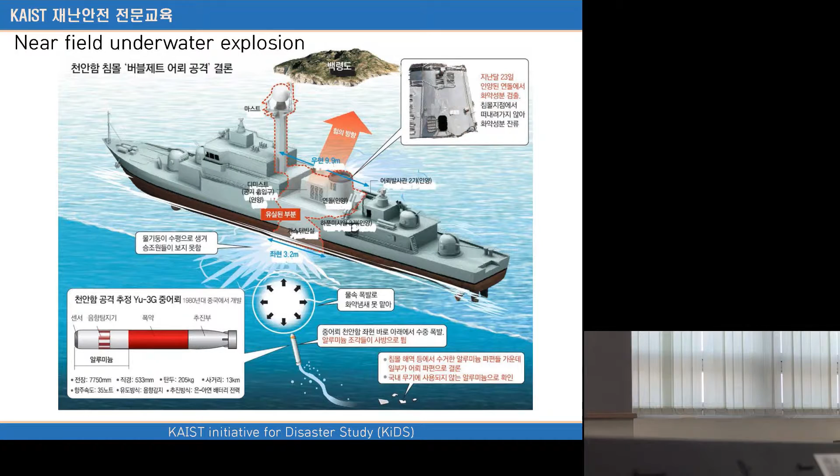There has been an official announcement that the torpedo came from a North Korea ship, but there is still debate on this. Anyway, I'm trying to show you the technological point that the explosion is not on the ship, it is near the ship. That is what we are calling near field. And then the ship is broken into 2 parts.

This is a real picture taken after salvage. This ship is still on display in a Navy base, we call it Pyeongtaek. Pyeongtaek is about west side of Daejeon. You can go visit and see this ship on display.

So this one is broken into 2 parts, and I'm trying to show you this is a near field explosion, not a direct contact by torpedo. You can expect that direct contact has a big hole when the torpedo hits the ship, but this one just breaks the ship into 2 parts. So this one is more critical to the ship - not contact, no contact.

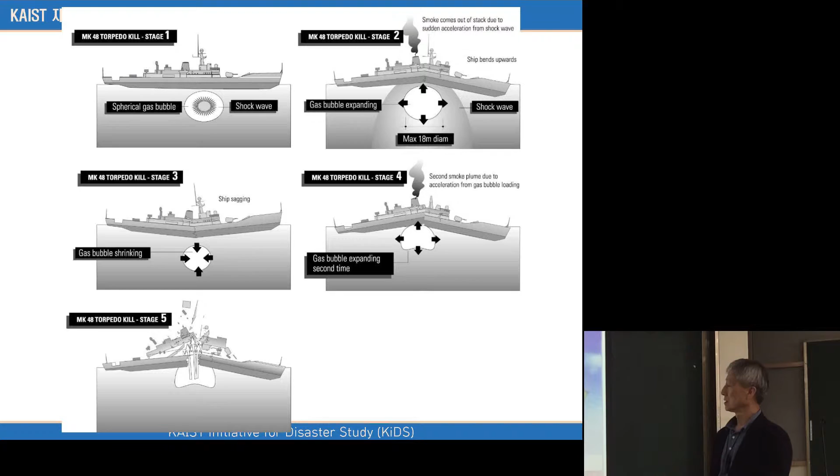This picture is coming from the U.S. Navy, so this is the technology we are talking about. There has been a report about this accident, but this is an experiment, not an accident - the U.S. Navy, long time ago. There is another test too, and you can see this also breaks into two parts, the near field.

You can see there is a regulation, United States regulation, that every new ship should have a real test and evaluation, like this one - a real experiment. Every new U.S. Navy ship should be tested this way, but not near field - this we call far field test. They want to see how the electronic equipment, including communication devices, can sustain the shock wave.

It looks near, but it is about one ship length apart. Shock wave is coming, and they want to see whether the electronics devices are safe enough. This is a regulation, a law. Germany also had a test, because this is a new ship, the ship should not be broken into two parts. So they have measurements of how much shock is coming and where.

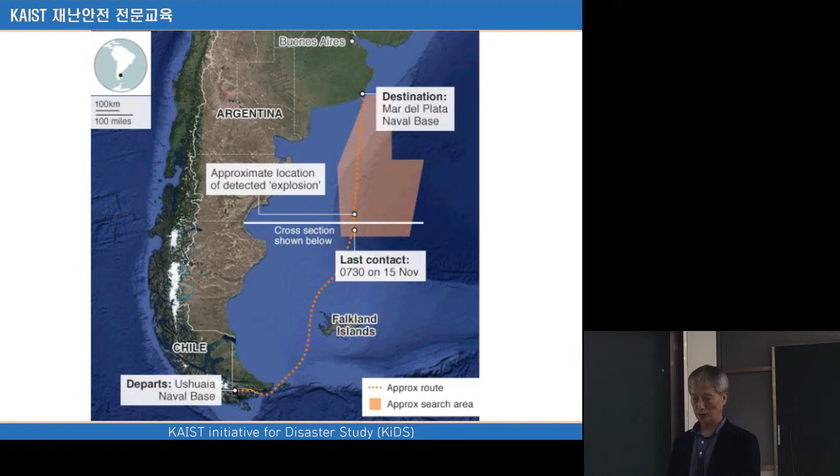And about the Sewol Ferry, we already showed you, so we can be fast. This is a ship, as he said, a long, old, renovated ship, so it has a stability problem at the beginning. This accident happened 5 years ago.

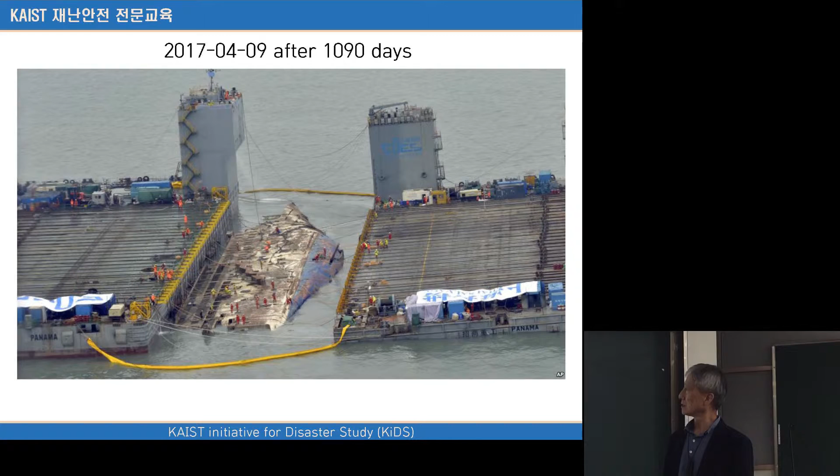So this is the Sewol after 3 years of capsizing or sinking. And this is a little bit more floating. All the wires have been put into the bottom of the ship for the floating.

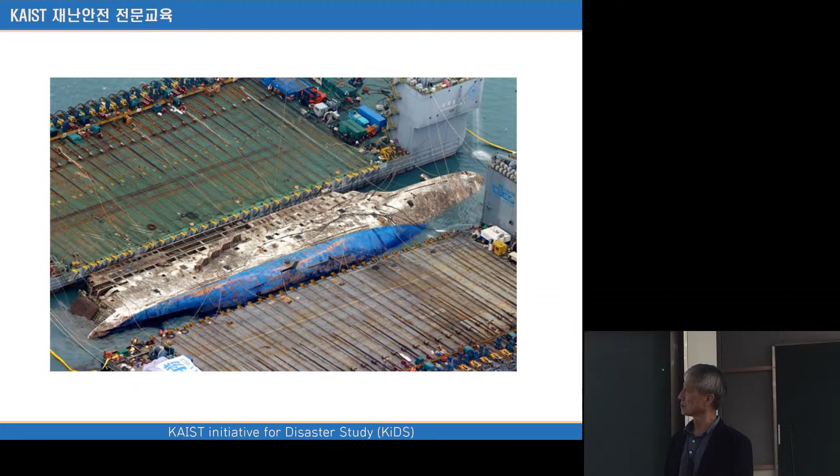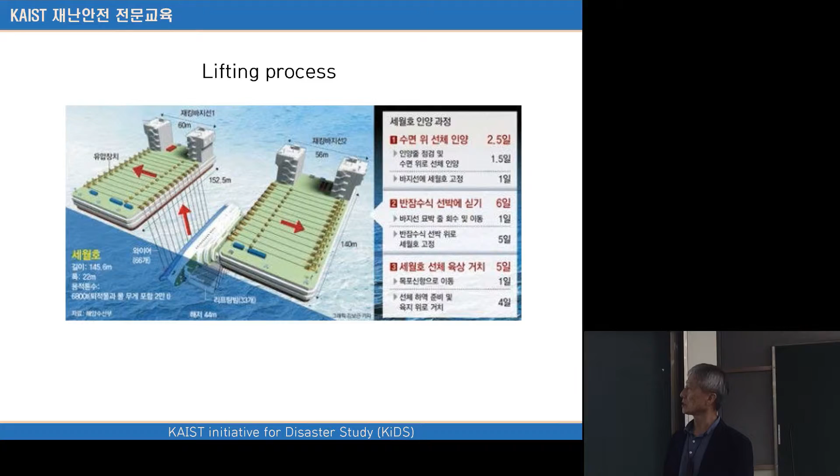And then this looks like a heavy lift ship, as we call it, for transportation toward the port. And this can be another way, but it is not used. But there are many such big ships in some shipyards in Korea. So it was one candidate to have a lifting at the time, and also this is the ship we use to carry that ship.

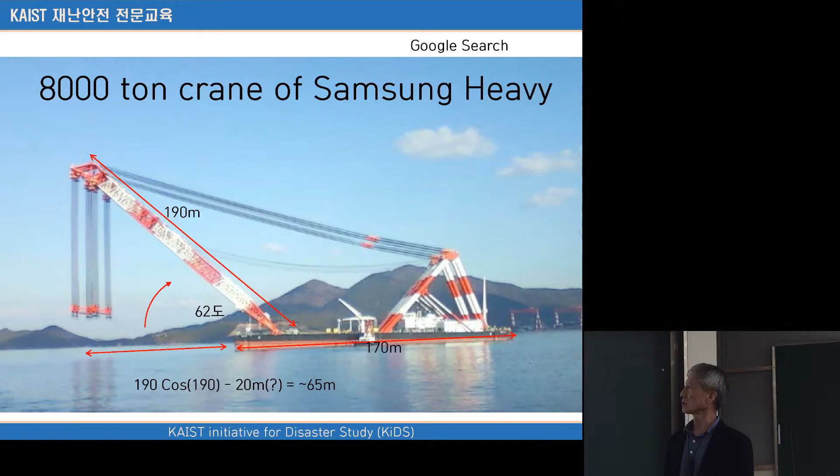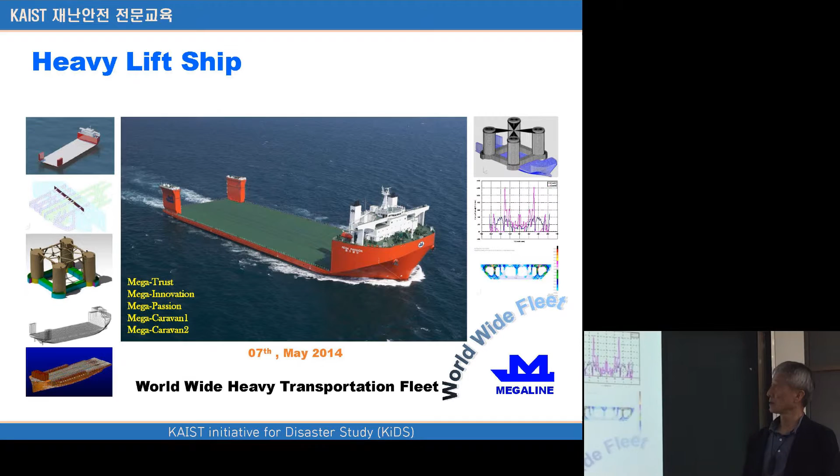Afterwards, they self-float again. So then they can be loaded like this one. After that, they can transport it in this shape. So this is a special kind of ship for heavy transportation.

This is a report coming from Sewol, and there has also been a towing test, a model test inside the Netherlands about the Sewol ship ferry. Reporting, where is it? No, 2 years ago, 3 years ago. Some videos.

And what is this? Another video. Right, another video. Okay, and this is interesting, you can see this one. You can visit it also many times.

This is the actual time, so 9 o'clock, 8 o'clock it started. So it takes about 1 hour staying in this way.

And as water is coming into the ship very fast, the angle is increasing more and more. After this, the ship started sinking very fast, so everybody was far away. We cannot do any salvage process there.

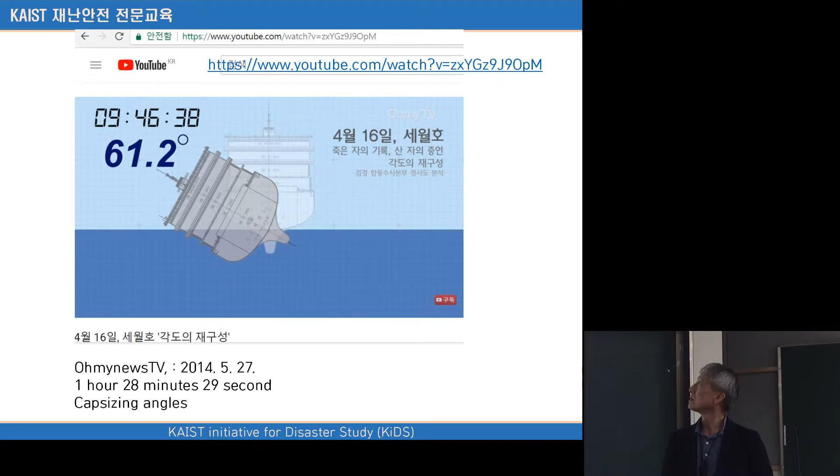Okay, and then this is the Italian Costa Concordia. You can see the number of people there, 4,000 persons. Among them, 3,000 are passengers, guests, and 1,000 are support crew members and personnel. Together there are 4,000. So if you have a big disaster like this, a sinking, then you can expect that many people could lose their life.

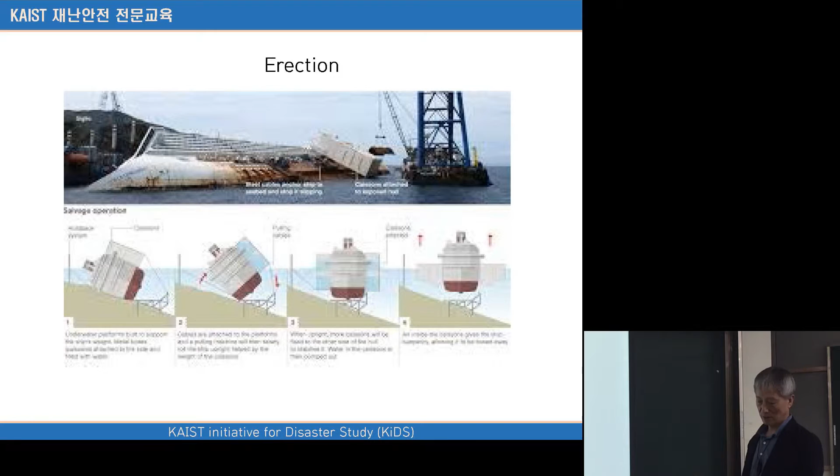So this is the idea afterward, because this ship was a very new ship, so the owner, after all the clarification of salvage, wanted to use the ship again after renovation. So they used special devices to stand it up, erection, and then transport it this way, very similar to the video of Sewol with the floating dock, and then transport it into the repair yard and renovate it. I guess they may use this one ship only.

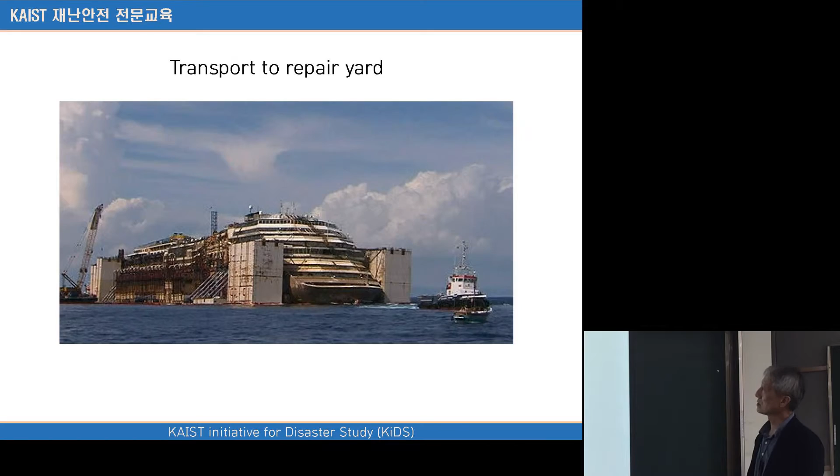This is a place where people should gather if there is an emergency, something like a fire. A cruise ship has about 3,000 guests, and also including crew members, 4,000. They cannot gather at one place, so there should be several places to escape, right? Also the lifeboats stay on two sides of the ship. But sometimes, many times, the ship is going in one direction, so the other side is where you should gather, right?

The gathering point - so I have, as a guest, a number for this. When something happens, I should go to this point, right? So an assigned point, we call this a muster station. The gathering point can be a place near the lifeboat.

Many cruise ship companies now place the life jacket at this point, rather than, in many cases for the Korean ships, the life jacket is near the guest - inside the room or near the chair. For the staircase, for Koreans, the students already wear this life jacket inside the room, but they stay there, waiting for the command.

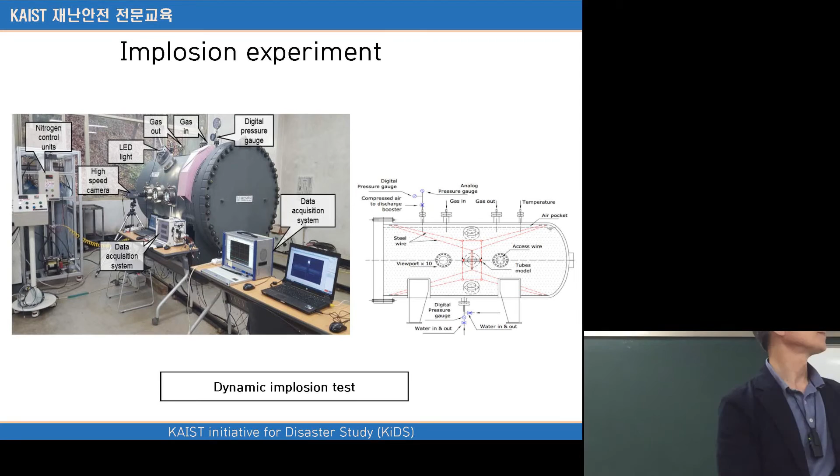This is another one called implosion. Implosion is very special, it's a reverse word to explosion. Implosion means when a submarine, say the Argentina submarine, sinks somehow - I don't know how they sink, but it goes down, 1,000 and 2,000 meters, then it collapses at some point. The report says many people heard about the sound coming from the ship. So at some point the submarine collapses, and at that collapse time there's a big shock wave coming - sound also, shock wave. So that's why we call it implosion rather than explosion - something collapsing rapidly, and there's a shock wave coming.

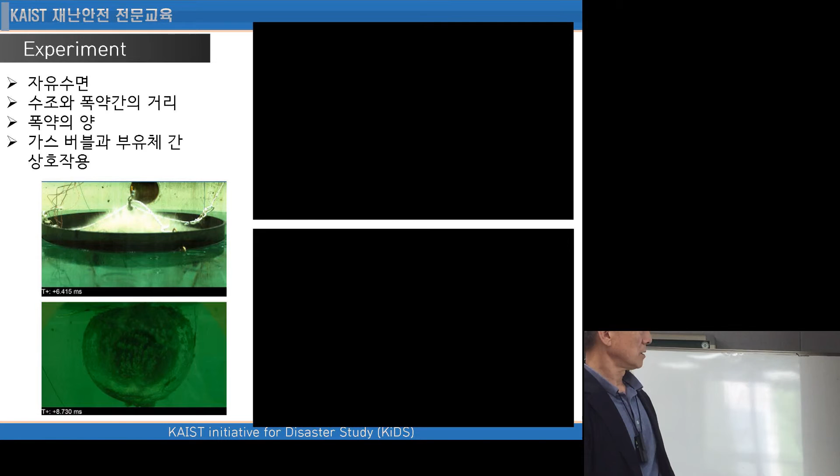So this is a test facility to test implosion in our research laboratory, and we try to collapse a small submarine, like an aluminum-made cylinder, with high pressure.

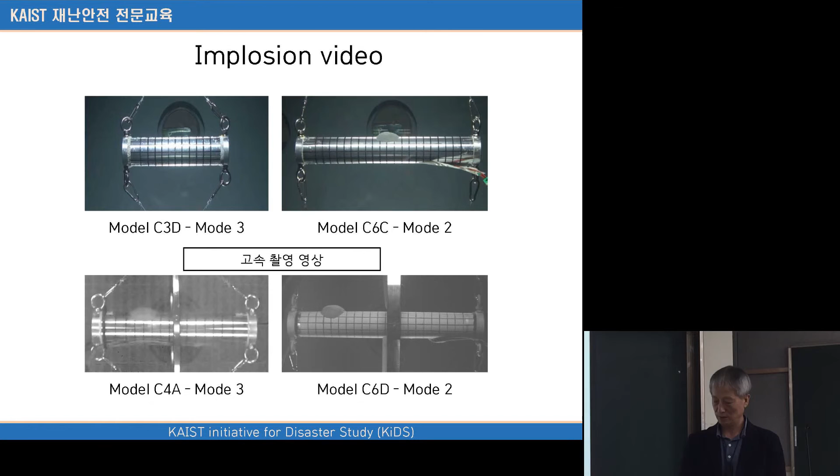This is Professor Kim Jin-wan.

This is also another experiment for the salvage or lifting of the ship.

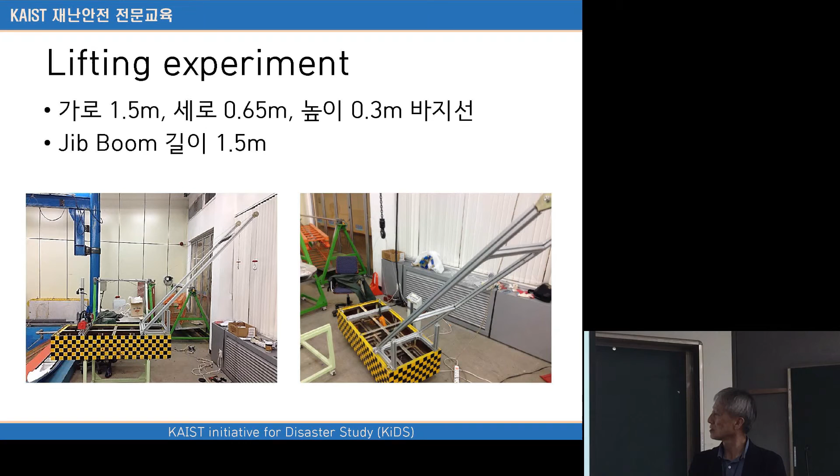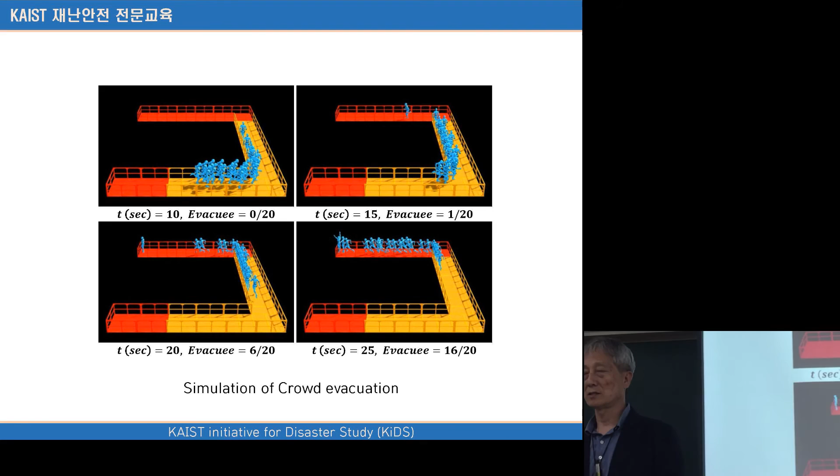This is just a simulation of rough sea disasters. Also, this is a crowd evacuation simulation, because the ship has a very narrow corridor, also chairs and staircases. Another difficulty is the ship is inclined, and then walking is not easy, so escape speed can be different from an ordinary building fire case.

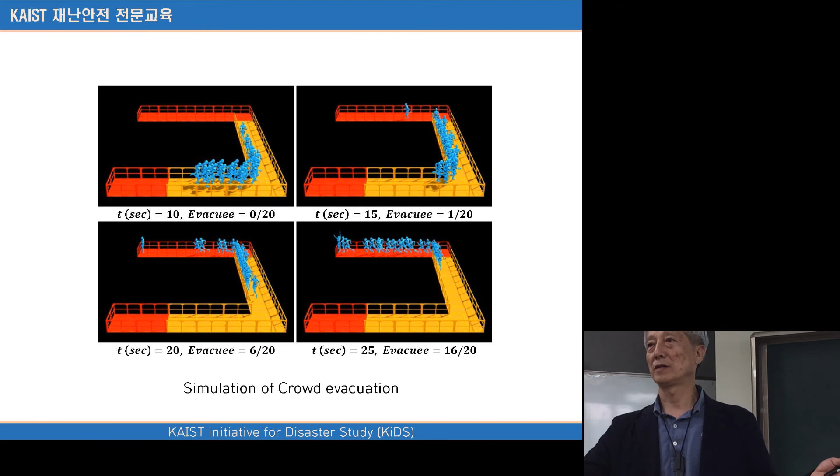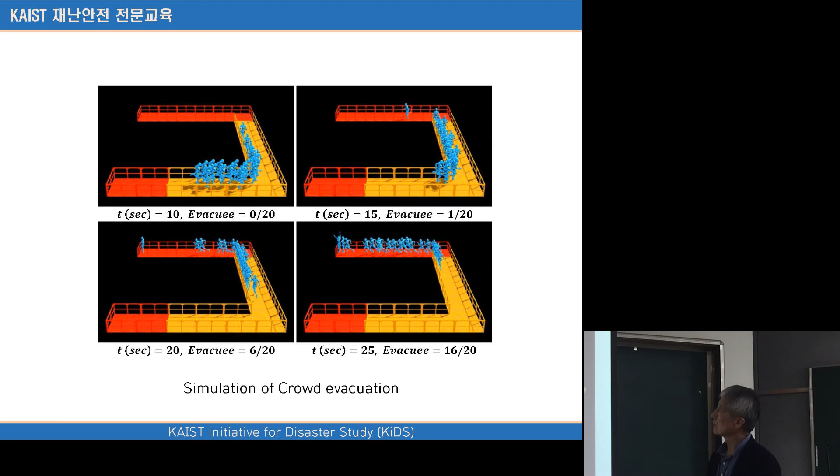So how can we estimate the speed of evacuation? In this kind of scenario, when there is debris or fire here, they cannot use this staircase, then only one is available, something like that - so it's just a simulation.